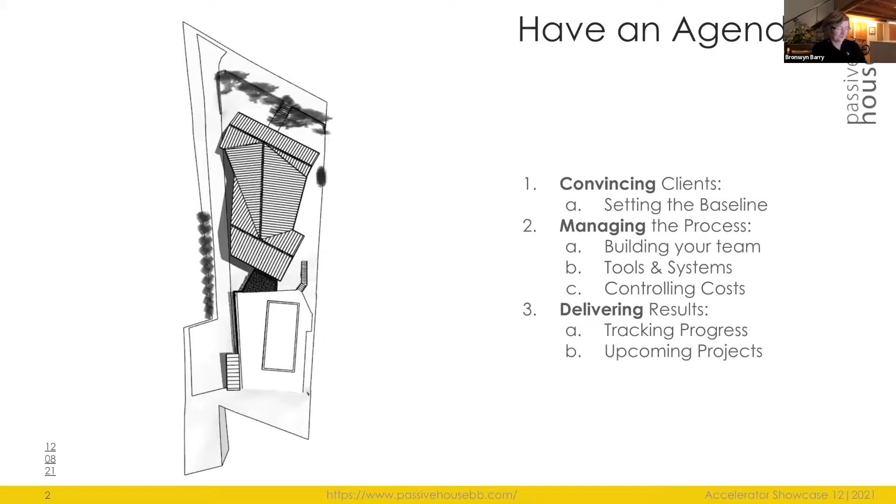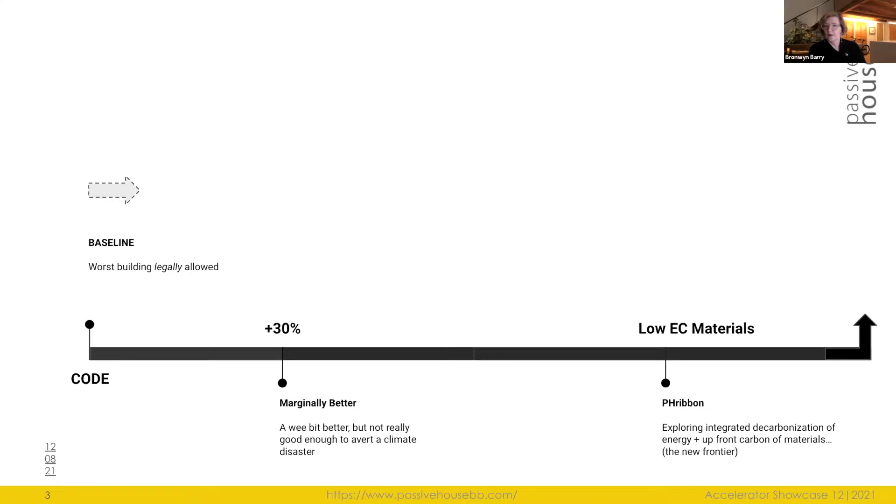So the big elephant in the room: I always have people asking me, how do you persuade clients to go to Passive House? And I'd like to flip this, because actually I don't. What I do is I've established my own baseline for my own practice. This is the key that I think everybody should really decide.

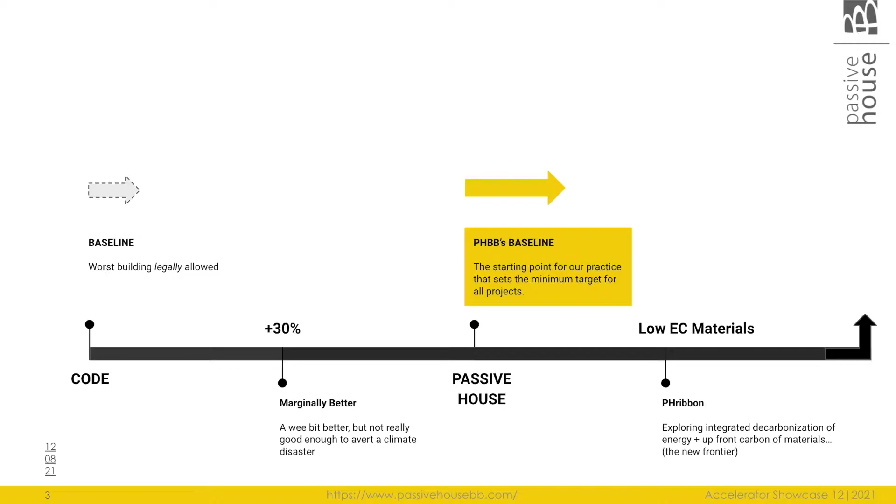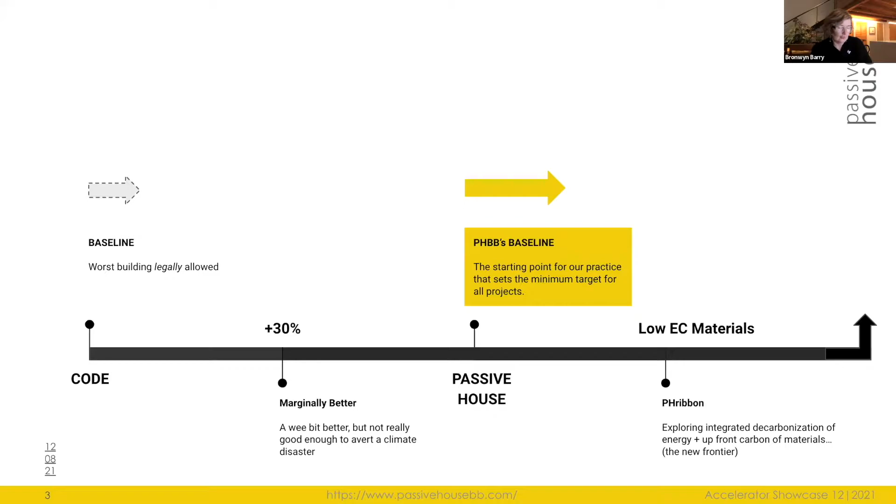What is it that you want to do as a professional, and set your own baseline? I really encourage people to take ownership of their practice. When we go to visit a doctor, we don't ask whether he washes his hands in between patients, we just expect that. As architects, we need to own our process and our practices, and really manage that agency. You get to decide what kind of projects you do. This is how I've established it: I just said to my clients, I only do Passive House.

That's my baseline as a practice. What I've done is made the choice I give my clients really whether to certify or not to certify. And that's plenty, that's really the decision that's theirs to make. But everything else is baseline stuff, I'm only willing to do Passive House projects as the core part of my practice. That just makes it super easy, and it's not even a decision you give clients, it's a decision you make about what you are going to do with your own professional practice and your work life.

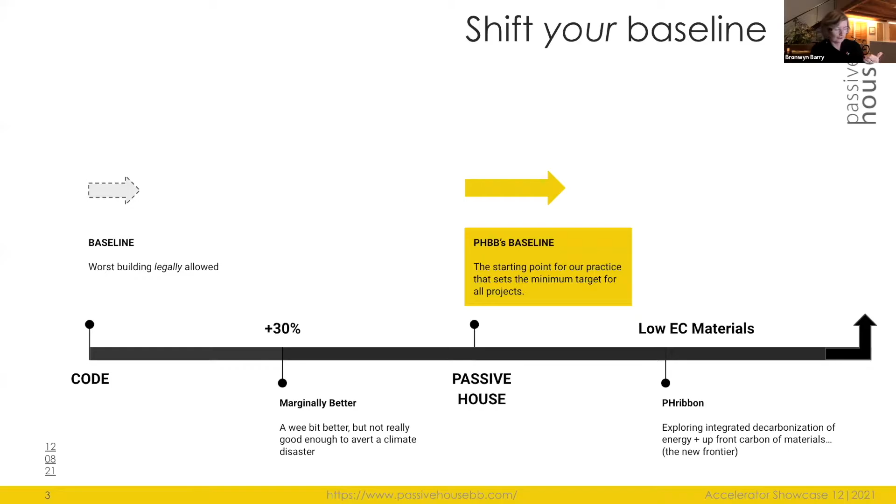Really where I'm going with my own practice is exploring low embodied carbon materials now, because Passive House is in the DNA of all the projects I do. It takes a while to really get to a real level of comfort with that, but it's not that difficult. And what I do is I make it really visible.

Building a team: I have worked very closely with builders for the past decade. I worked exclusively with Alan Gilliland at One Sky Homes, essentially subcontracting my design services to his firm, so we delivered our projects as a design-build package. Now, since Alan's retired, I'm building a stable of other contractors I'm working directly with. So my team is now really magnifying.

I get to work with a huge group of really smart people, and it's a resource I think a lot of architects don't really utilize very well, because it's a huge group of people who are all very passionate about what they do, and they have a huge skill set that I can actually utilize to the benefit of my design and my practice.

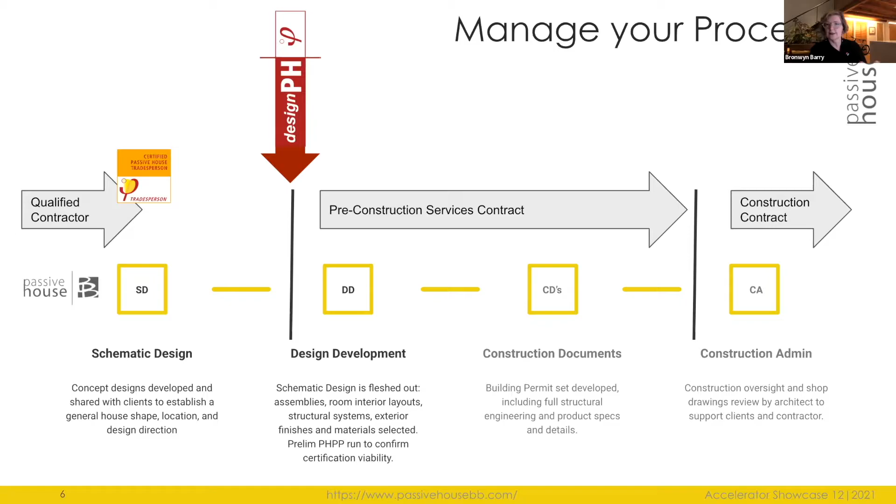How I integrate them into the process: my own contracts are directly with clients, and include all the regular processes architects typically deliver, from schematic design, design development, construction documents, and construction administration services. Then what I have my clients do is engage contractors right at the design development phase, and negotiate a pre-construction services contract with the various contractors I basically set them up with, and they're all pre-selected because they've gone through the training. So there's definitely a pre-qualification process that happens. But this alliance, this collaboration, happens very actively in the most juicy part of the design and development process, and it's a real synergistic collaboration that I highly recommend.

And where I get to utilize these contractors, I really work closely with them to vet products, making sure the local supply chain is robust enough to be able to spec a specific product.

So I'll find stuff and say, make sure you can source this locally, then give me the cost, means and methods. All my details get vetted through the contractor to make sure it's sequenced correctly and that they're comfortable with it, and that they have subcontractors who can actually deliver that specific assembly or detail. I get them to do feasibility and always budgeting. The sooner you get the budgeting and pricing for particular materials up front, the better, and it makes for a much smoother transition from construction documents into the implementation process.

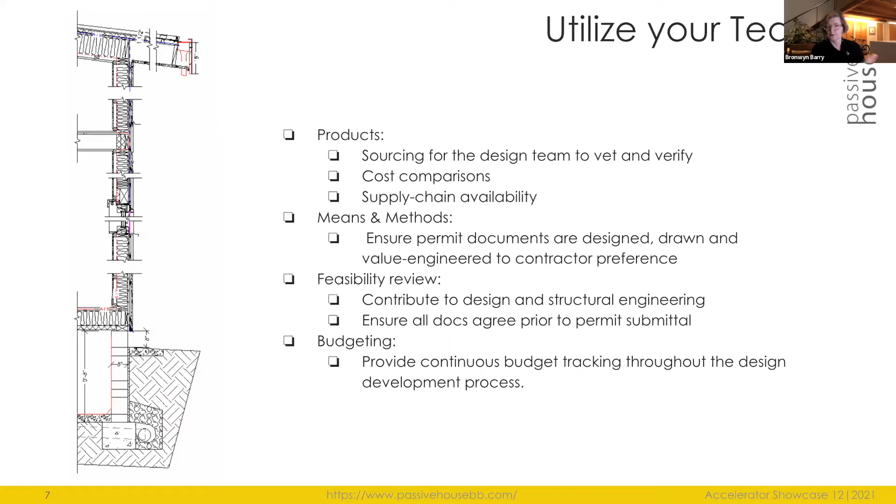For tools, I don't think I'm using anything revolutionary, but it's worth reviewing my toolbox. I use Basecamp for all the communication for all my projects. Each project gets essentially a digital filing cabinet for all the conversations and documents that happen, and schedules as well.

I use Google Docs, Sheets, and Slides. I love those because you can share them with people and have multiple people contributing. For invoicing and reports, I use a service called Ronin app. It helps me track hours, and the reports feature is something I really value - it helps me keep a tight rein on design costs. For modeling, I use PHPP and DesignPH. And for post-occupancy monitoring, historically I've used SiteSage, specifically with Alan. That's really helped, and it's a key tool in the toolbox.

Costs - I only do design cost plus contracts, so all my contracts are hourly. I don't do fixed fee contracts because I think they put myself and my clients in opposition to each other rather than in collaboration with each other.

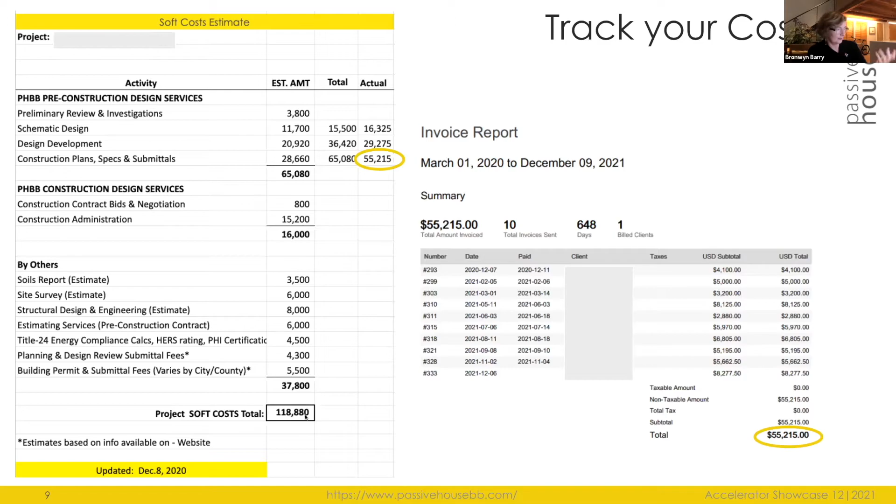Oh, and by the way, I also include all these other estimates that clients will have to pay that are not delivered by me, but other fees clients have to pay in order to build a building - soft costs. So that clients have a realistic idea of what they'll really need to pay to build and design a building. So that's all soft costs.

I've got a ping there.

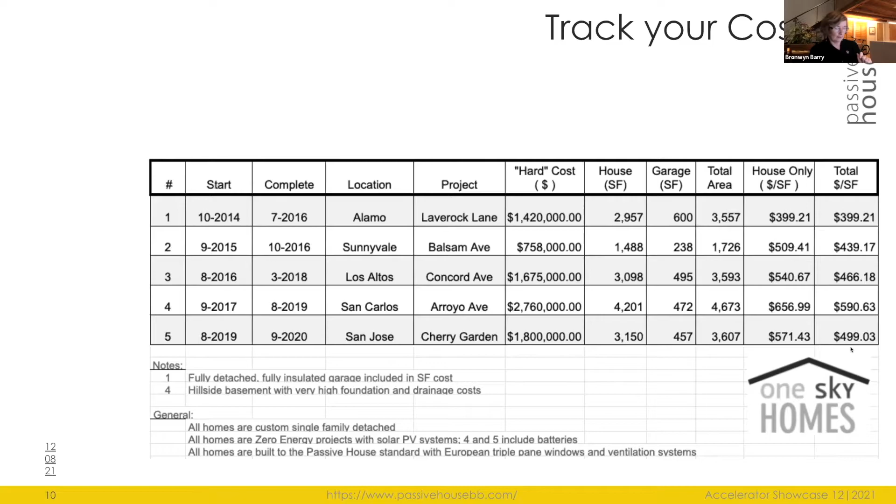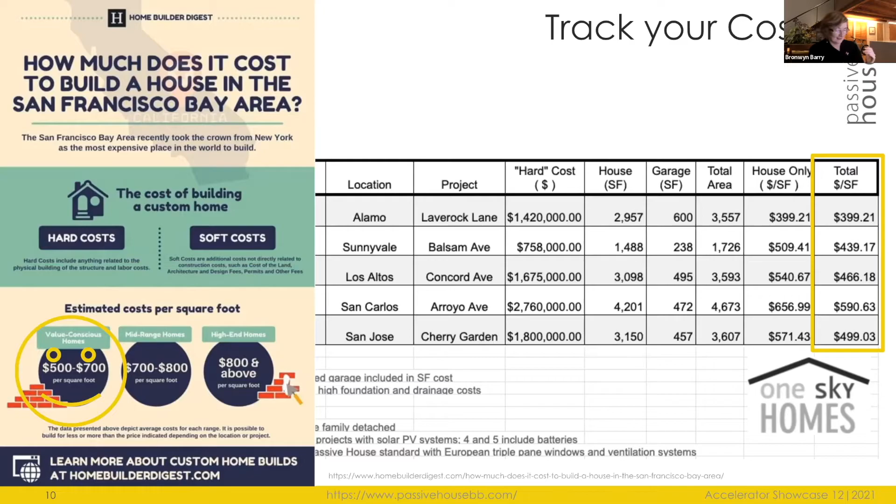Now I've got hard costs. Allen tracked all of the hard costs for our projects since 2014, or five of these anyway, and we looked at a breakdown of what they actually cost per square foot. A recent report from Home Builder Digest looked at similar custom construction projects in the Bay Area, because these numbers look crazy until you compare them to what else is being built - custom homes in the Bay Area. And lo and behold, we turn out to be value conscious, which is awesome to know. We should have been charging much more because we're delivering passive house levels at value conscious prices, in fact kind of lower. So never let anybody tell you that passive house costs more.

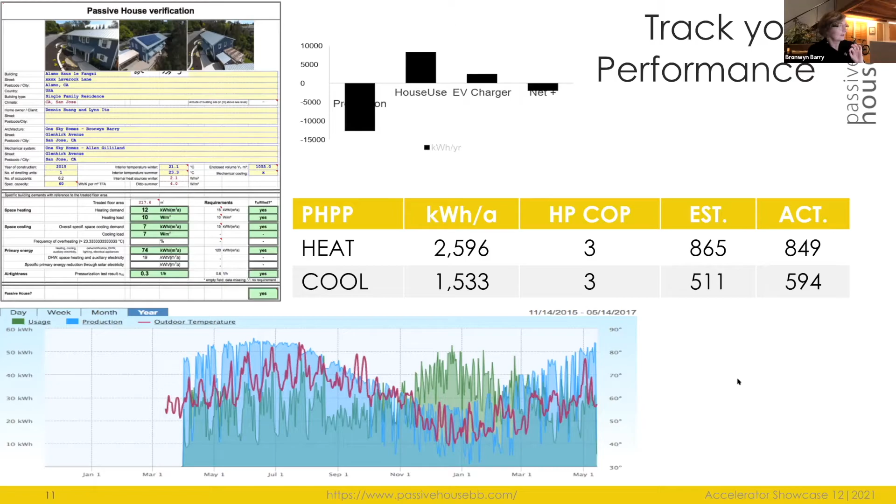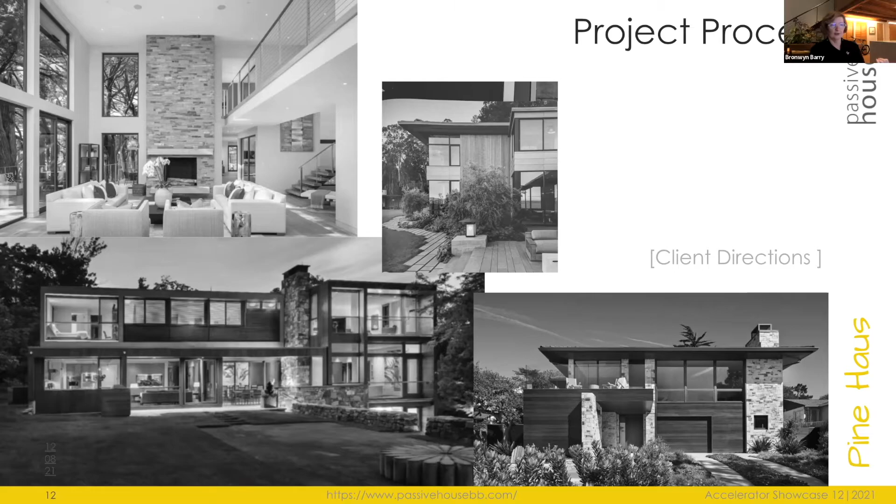I went back to them and said, okay, Monterey has this fabulous tradition of Monterey modern. And this is what I'm going to bring to the table and use as a way to help inspire and interpret a design for your property.

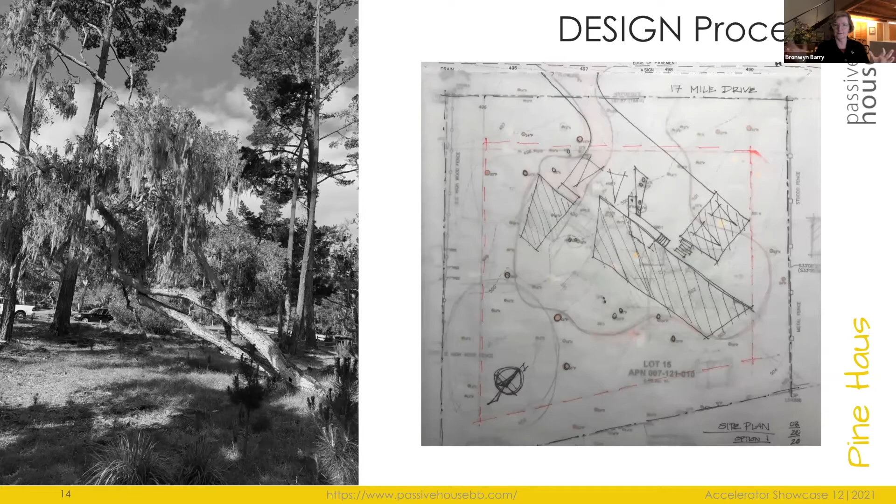I dug into the actual property itself. This is a picture from the site. The site has these fabulous tall pine trees with a very vertical element, and then these oak trees that have a very horizontal aspect because the soil is really thin in this coastal site. I went to my sketchbook and came up with these ideas of what I wanted to propose for my client.

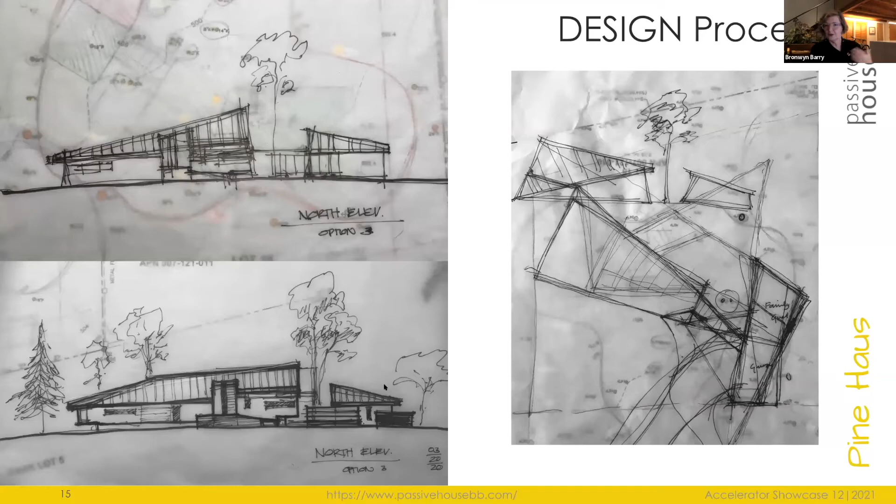You can see I'm playing with the verticality of the pines, and I'm playing with the horizontality of those oaks. I'm riffing off of that Monterey modern tradition. This was an early proposal, an idea for how this house would look.

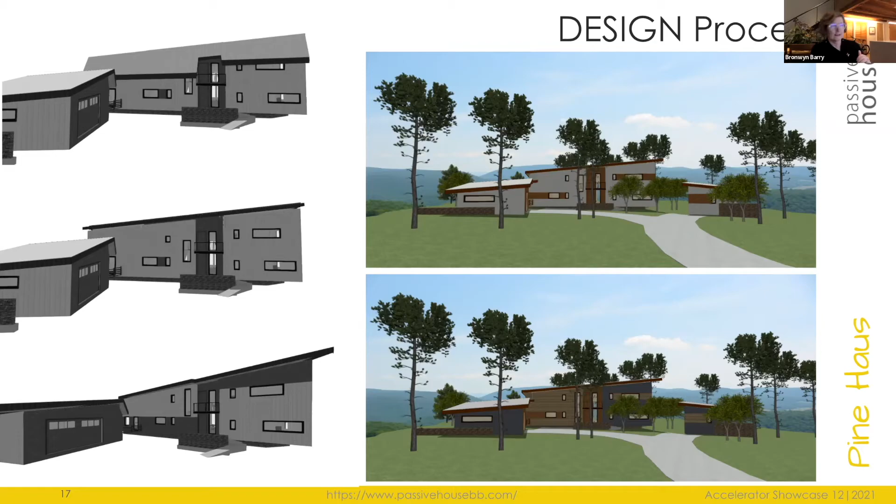Then we went through a whole lot of iterations. The client wanted that strong horizontality of those modern, flat roofed houses, so I was looking at how to change the roof to do that. These were some siding explorations, looking at different compositions and materials. And this is what the actual design is going to hopefully look like.

We are currently stuck in an interminable permitting black hole. I've been waiting 1.5 years for approval. I'm sure a lot of you architects are in that position right now. But it's vertical siding, lots of vertical tall windows and horizontal windows with cedar cladding, which I'm really excited about, and I do hope it's going to get built.

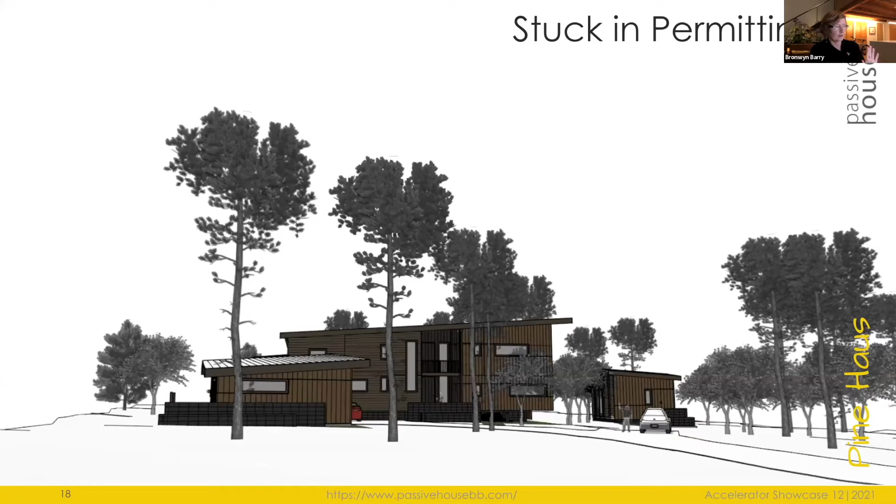These are a couple images from the back side of the house. So the front side is pretty vertical with a flat facade - that's the north. On the back side, the south, the roof sort of wraps down and comes down quite an extent of the house with much bigger windows.

Another project I'm really excited about - this is in Clovis, California, sort of Fresno central state, super hot summer and a quite cool winter. It's foothills. I'm working with Andrew Mitchler on this at Hyperlocal.

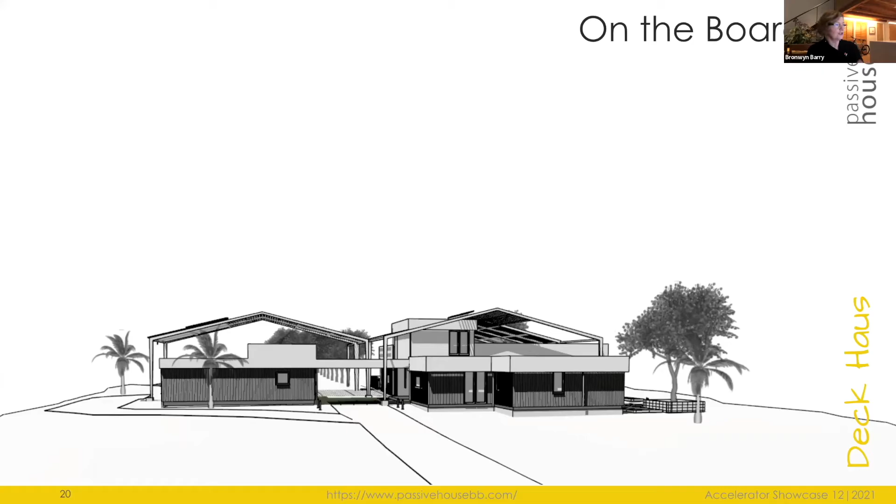We've been collaborating on this project, and we've essentially designed a big umbrella over a modern, flat roofed house. We're playing off of the agri-vernacular, those metal, steel agricultural buildings that are quite common in this region, and I'm integrating it into residential to provide this nice shade. That's another perspective on that house, with a nice roof deck the clients will be able to utilize on that property.

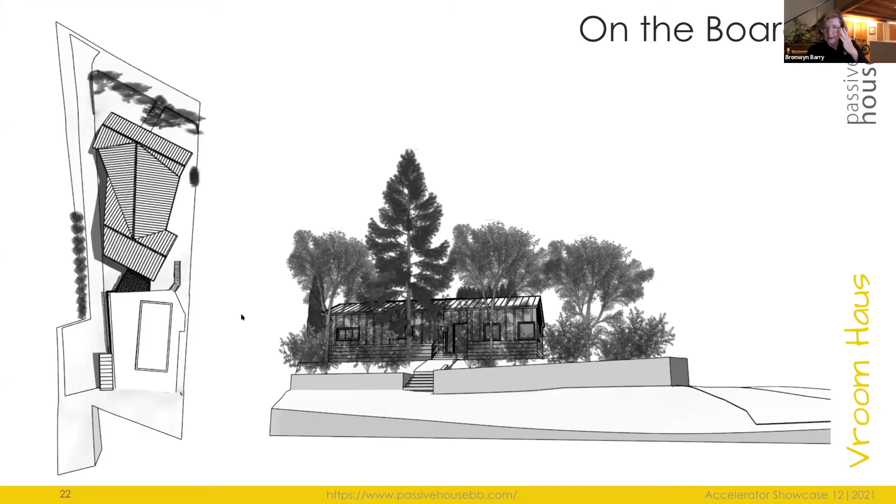A project I'm working on here is a retrofit in Redwood City, close to the home - an existing home I'm renovating with some lovely clients who have a penchant for Japanese sports cars. So I'm giving them a big garage in the back here, keeping the existing front cottage, which is a 1950s shack basically, and we're adding this backside double house that connects to the pool and the existing pool in the back side of this very steeply sloping property.

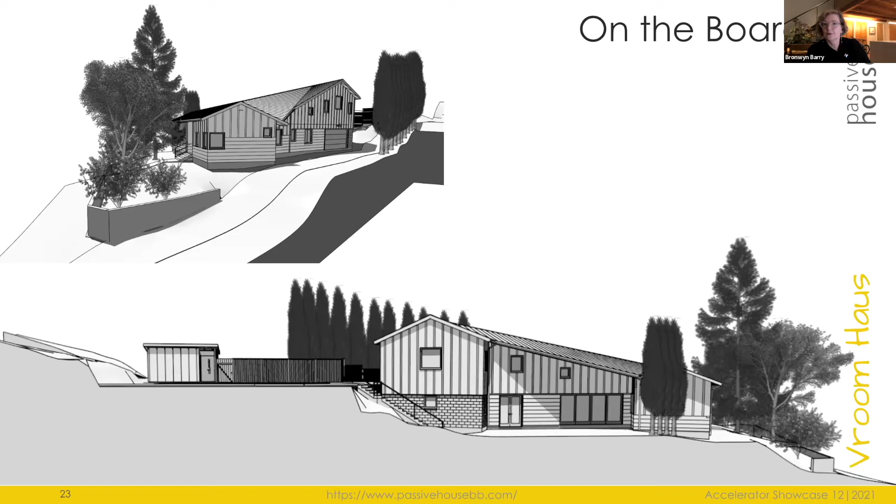Again, I'm using the roof. I'm finding basically all I'm building is big umbrellas, because in California, shade and more shade is what we need for passive house.

The last project I'm sharing with you here is another lovely set of clients with a spectacular property, also in the foothills but closer to Sacramento. This is in Amador County, and behind them is the spectacular Butte. And I'm designing this house.

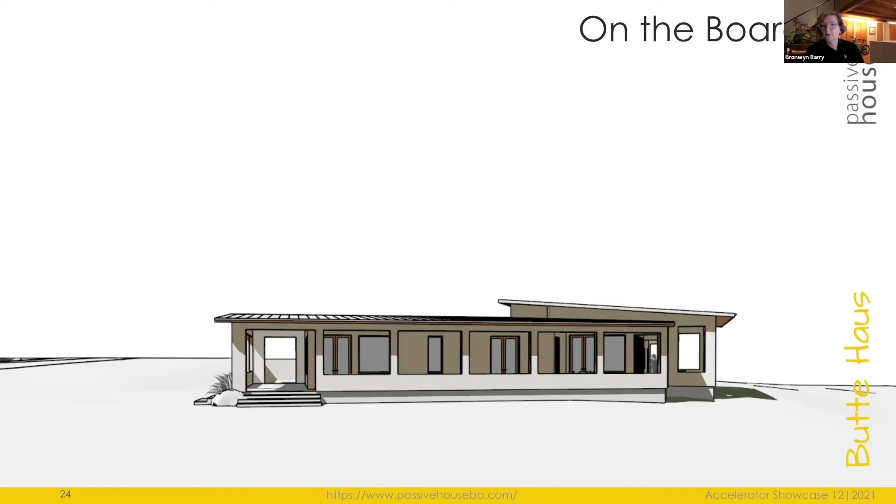It's still sort of schematic. We're working through design development, but I've designed a huge big wraparound porch, a loggia all around this house, to shade the house from the harshness of our California sun and heat. You can see on this bird's eye view, loggia all around the south and the southeast corner. North side is pretty well shaded, and I've got a courtyard entrance here.

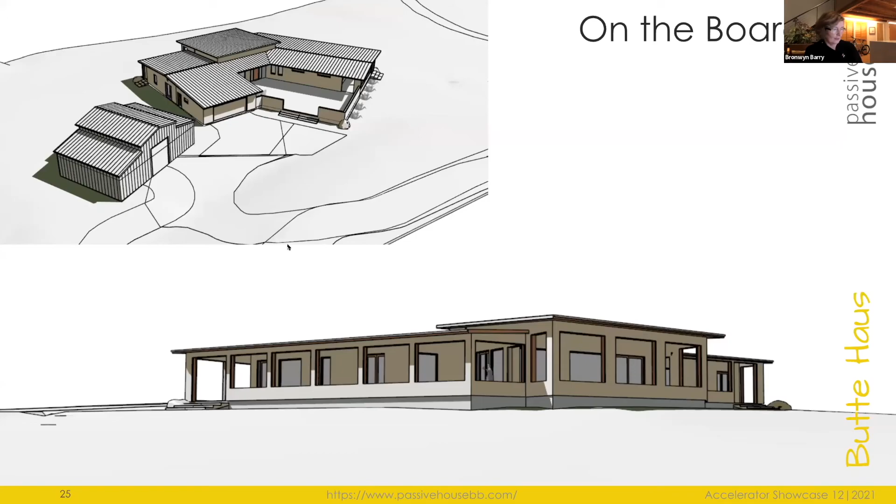This is an existing workshop building that they've also put on the site. So really that's the sum of what I've been sharing with you today.

So that's really it. I hope I haven't gone over my time.